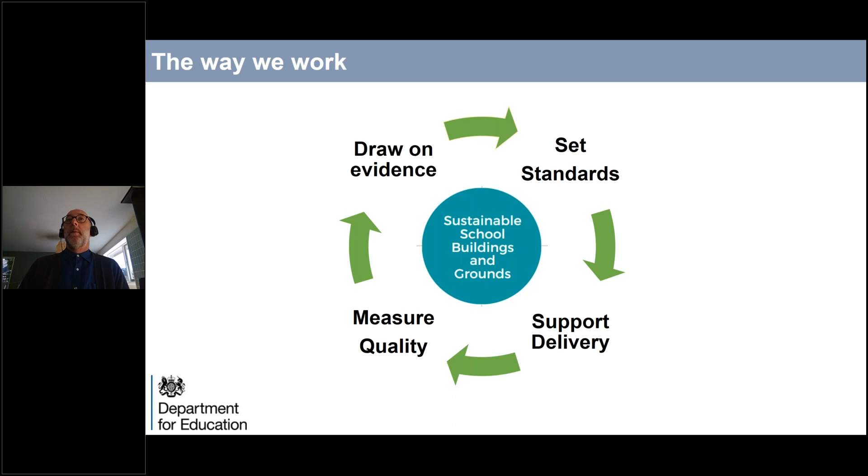We've set a 10-point climate change model to drive forward the agenda at school. That's all about efficient use of space, reducing energy demand, then optimizing energy efficiency. I'm not going to run through all of the key aspects of it.

We follow the fairly traditional green model of be lean first, and then be green following after that. That's really important to us, that we get fabric first approaches to our buildings rather than focusing on technology. Behaviour is really important to us as well, so it's all about operation at this point, and it's clear that we've got a plan to get to fully zero carbon buildings by 2025. I'll pick that up in a second.

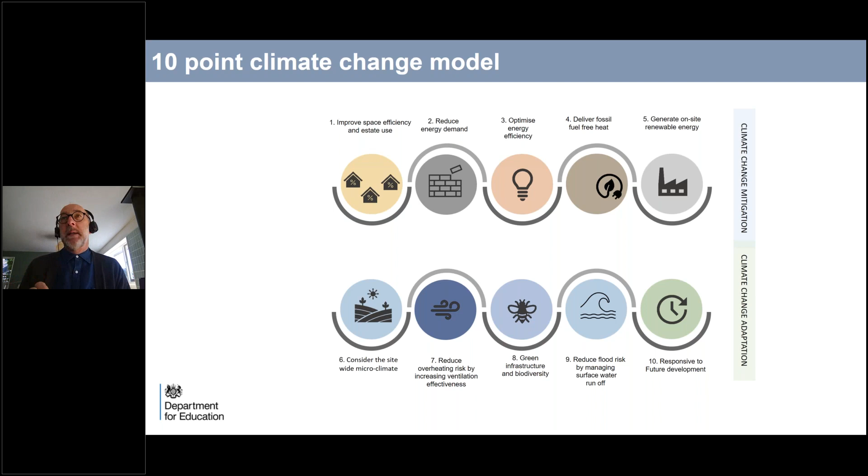Another key aspect in terms of site is the use of green infrastructure. We now understand that green infrastructure has got multiple benefits in terms of bang for your buck in relation to building construction. Maximising green infrastructure is a key aspect for us. It will play into a lot of government strategies in terms of the environment, increasing biodiversity, but it has super effects on the building in terms of cooling, and brilliant effects in terms of health and well-being for the occupants. We think that's a key area we should be looking at across the industry.

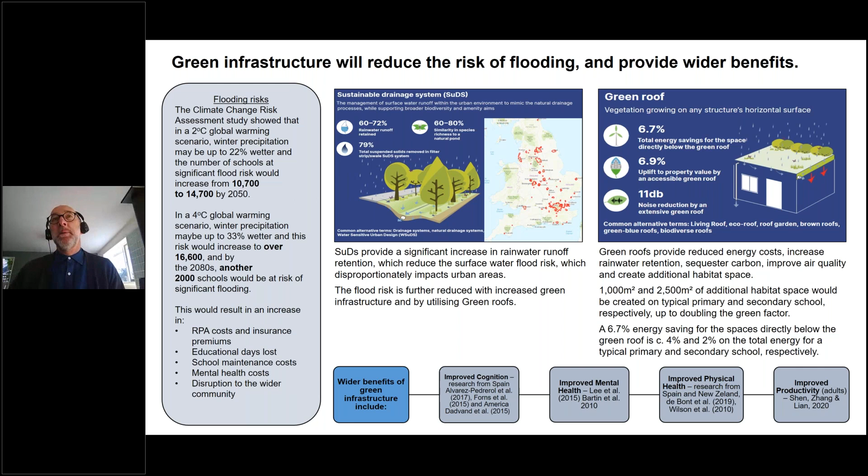As I say, we collect evidence and we measure quality and we collect evidence. So we've done a lot of R&D projects recently, and Thomas mentioned the Gen Zero project, which is funded by the Construction Innovation Hub and Innovate UK. It's a really unusual project for us because we don't often get the chance or the money to do pure research, and this has been a great opportunity to really expand the envelope in thinking about what a school building of the future could be.

So we developed two prototypes, one urban and one suburban, that are both zero carbon in operation, net zero construction carbon, really driving standardization and systems thinking. It's designed for manufacture and assembly, provides that unified site and building approach that I mentioned, that's user-centered, flexible and resilient. As I mentioned, it's got an urban and a suburban solution.

So we've come up with a new system for building schools based on a rigorous grid of mass timber solution. Studies we've shown, as many others have shown, that really timber is the only way to drive carbon out of construction. We're going to be building a prototype section of that at the Manufacturing Technology Centre in Coventry. We'd like to build a full-size classroom for COP26, but that's yet to be confirmed, waiting on future funding.

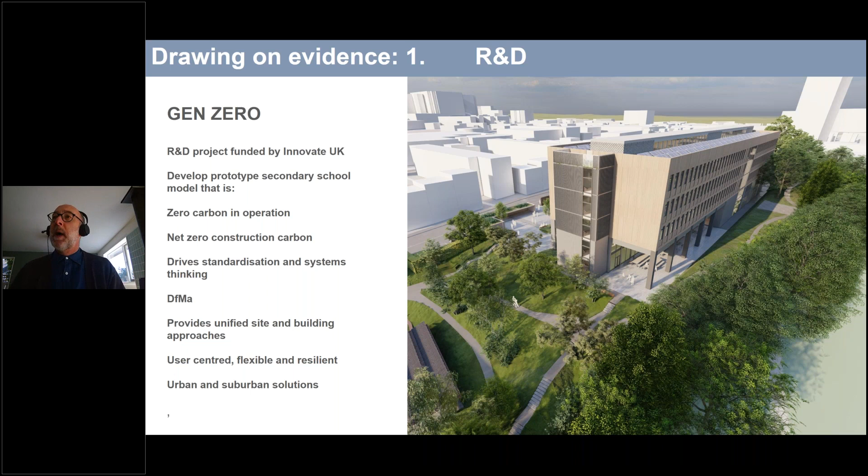Second bit of evidence: we've done a lot of pilot projects because we're a capital delivery unit, building lots of schools, so we can use those schools as test beds. We've got a Pathfinder project, the first one we have on site, a small primary school in Cornwall which is net zero carbon in operation. We take a fabric first approach and used existing MMC contractors. This is all about tweaking existing ways of working and improving them - can we, through normal means of production, deliver much better schools? Again, we've emphasized the use of outdoor planting and green infrastructure.

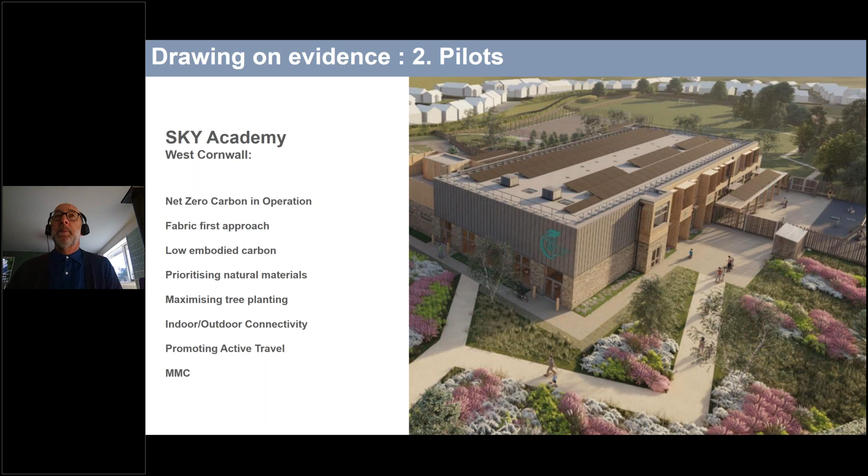The third project is St Mary's Biophilic School, which will be England's first biophilic school. St Mary's in Derby unfortunately burnt down last year, and we've taken the opportunity to do a development project led by the design team that's going to drive forward the use of green infrastructure for environmental, educational and health and well-being benefits. But again, using principles of standardization, following through our Gen Zero model, off-site construction - a really fantastic opportunity. That should be on site within about 8 to 12 months.

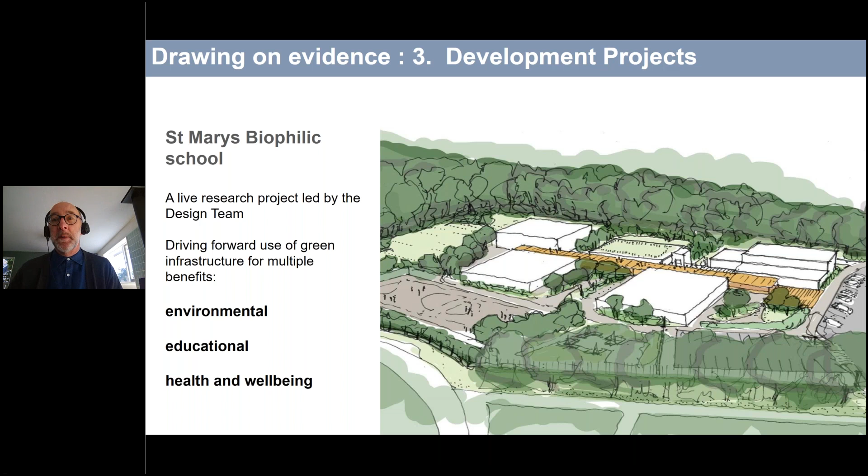We have got a new specification for schools. So all of our schools are built to a very standard specification that's based on all that evidence work that I mentioned at the beginning. But we're about to launch a new version of that, which is net zero carbon in operation. That'll be ready from November 2021.

That's going to put the long-term needs of the school users at the centre of all our decisions, future-proofed against climate change, create a healthy and productive school setting, and prioritise the application of low energy, fossil-free buildings. So we're looking at mitigation and adaptation - we're particularly concerned about how schools cope with climate change, overheating and flooding, but also about improving biodiversity.

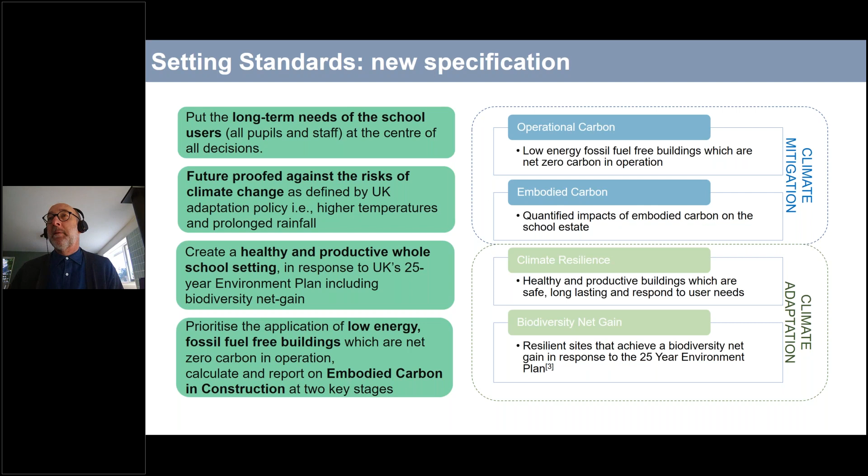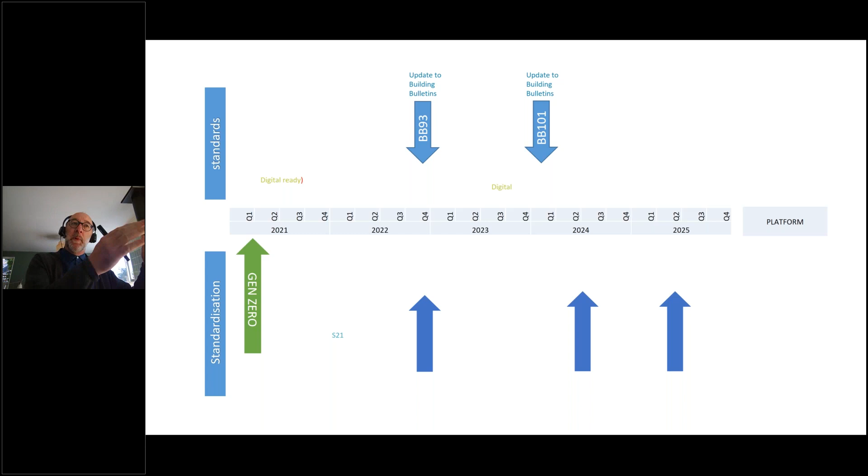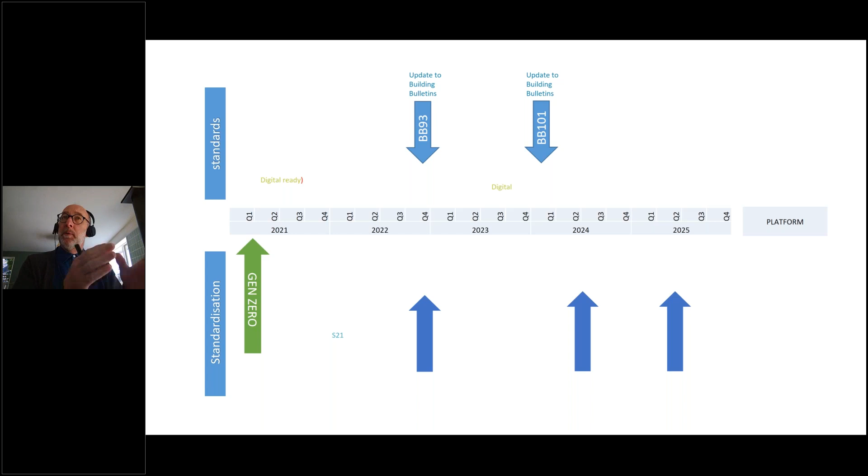I want to take you through the journey we're on in terms of meeting net zero carbon. We're splitting this into two aspects: standards and standardization. Standards is all about what we can do and when we can achieve it by, and standardization is the best way of achieving that on a large scale program.

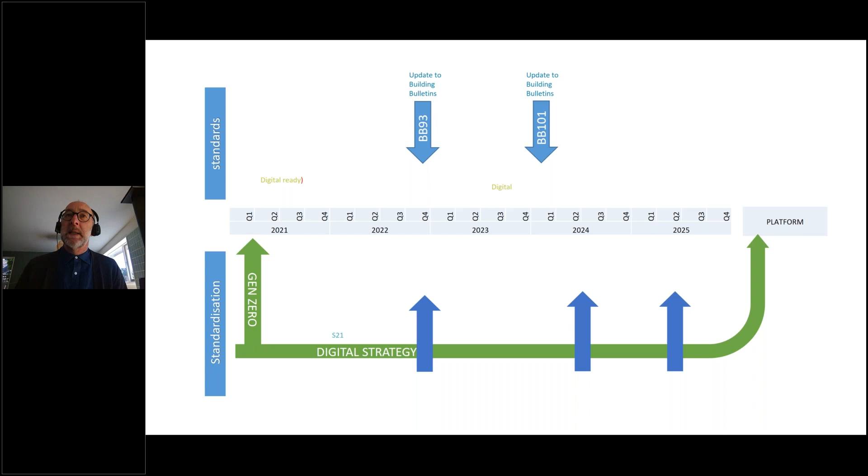We have our Gen Zero learning up front, which we'll combine with a digital strategy, using the best of information technology to drive delivery of new buildings, management of existing buildings, a sustainable school strategy covering 22,000 existing schools as well as new buildings, and a commercial strategy — a different way of building, procuring and financing buildings.

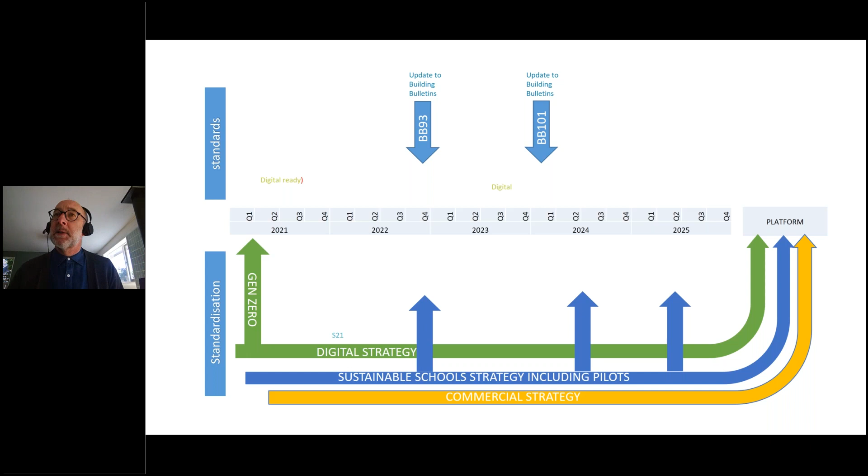We don't think business as usual will deliver the right outcomes. So we've got our new output specification ready this year. We're going to develop new standard designs based on our Gen Zero model, asking contractors to follow those from 2022 onwards, and we're adopting quality management systems internally.

We'll have a further version of our output specification setting construction carbon targets in 2023, followed by a digital version of our standard designs with parent and child BIM object models. We'll work out the best way of delivering something and allow contractors to drop down those models, with further development of quality management systems.

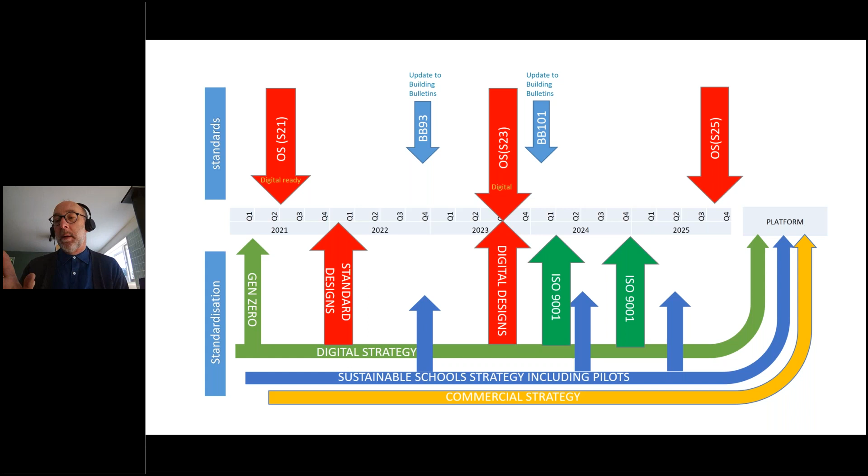Finally, in 2025, a complete output specification addressing construction carbon as well as operational carbon, realizing a platform system approach to delivering complete new schools — good quality buildings, net zero carbon, health and well-being, and a great quality environment and habitat. That's the end of my presentation.

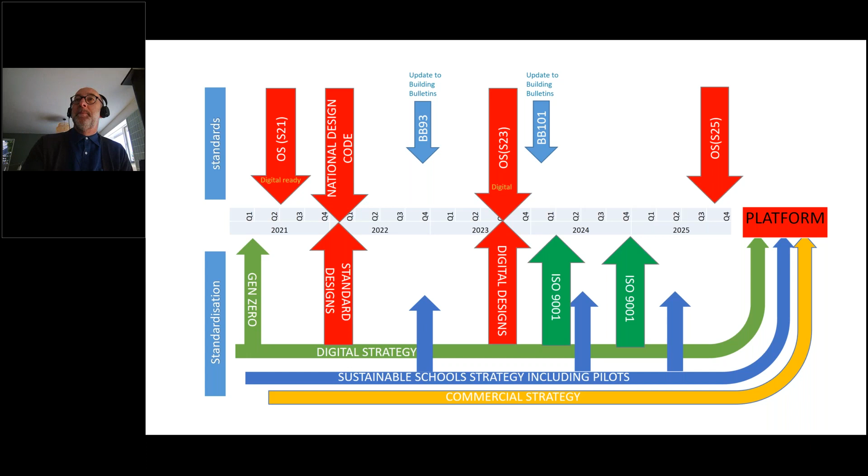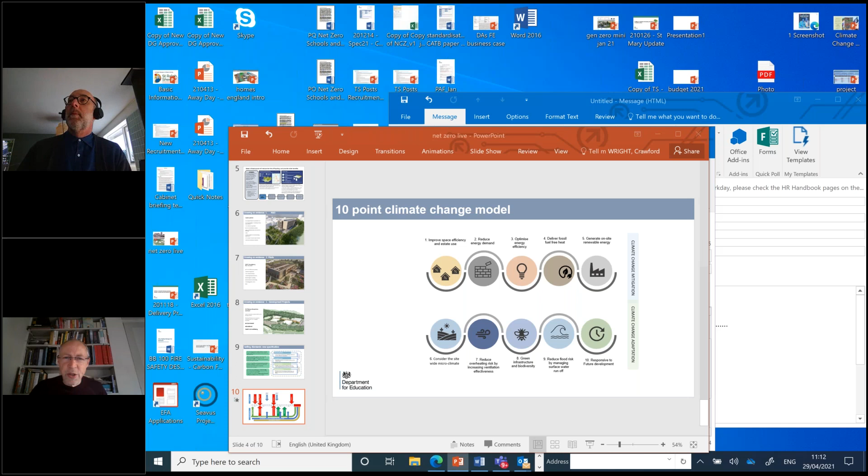Great, thanks very much, Crawford. It's really interesting to hear about the work you're doing. With Gen Zero, it's obviously a huge undertaking — is there anything that represents a particularly difficult challenge, given you have to consider so many things with a net zero school?

Well, I think the same challenges we're all facing across construction: can the construction sector deliver net zero carbon buildings? That's the key aspect of our Gen Zero project — how do you unpick a traditional sector and rebuild it, thinking about carbon and rethinking our use of materials, within the current regulatory framework, which may in some circumstances work against us. Take timber, for example, and reducing the amount of concrete and materials — we've got our own standards working against this, things like acoustics and lighting. Is it time to rethink all our standards and measures to deliver these outcomes?

And I come back to our understanding of buildings in use — I think this is a big gap for the sector. We don't really know how buildings are used. We design them and then walk away, without really understanding how they operate over their lifetime. That's the missing piece for me — what do we really know about buildings in a much more holistic way?

Great, well, thanks very much. Maybe some of the issues you've raised will be covered by our speakers. Our next speaker is Simon Nicholas, the UK Managing Director of the Robert Bird Group. If I can hand over to you, Simon.

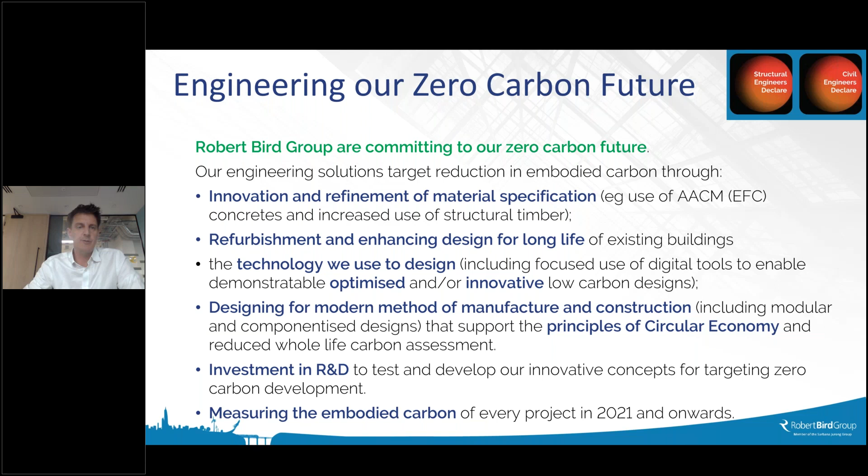But we're in a transition as an industry, and I think it's appropriate that we recognise the transition, but don't let that be an obstacle or an excuse. We need to find innovation. We need to find alternatives.

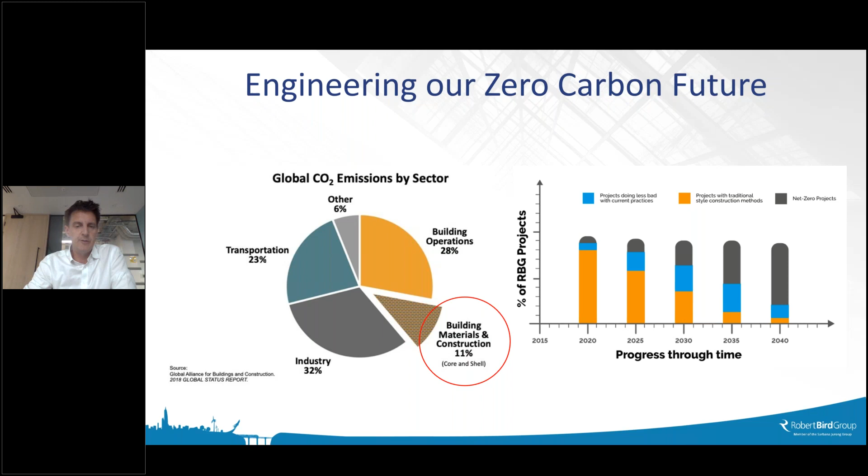Mass timber is one of those alternatives. Timber's been a structural material for millennia. It's a great structural material. It has challenges around fire performance and acoustics, and I think there'll be issues of supply as timber's used more and more as well. But we've done several projects in mass timber and continue to see this as a really important material for us to design and specify as structural engineers, particularly on low and medium rise buildings where the challenges can be better mitigated.

It's important that we think through as a multidisciplinary team how to resolve those issues which go beyond just pure structural performance.

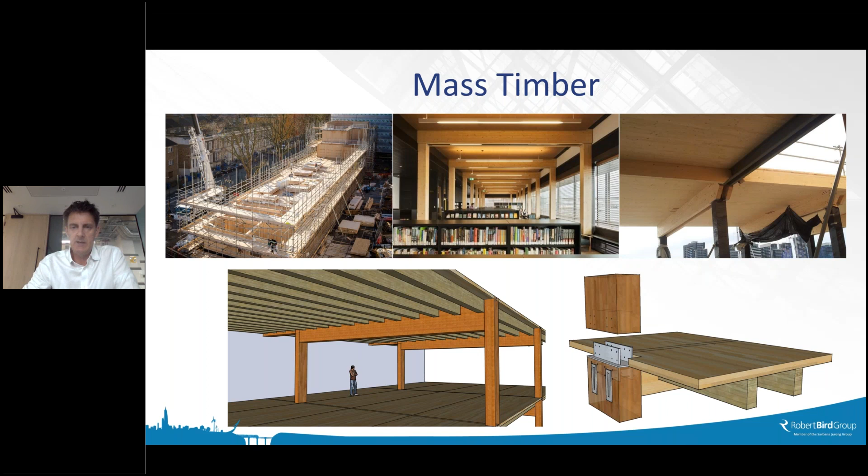Circular economy and designing for reuse, I think, is a really important part of a structural engineer's approach to carbon. How do we use and invest the carbon intensive materials which are the normal, but in a way where they're able to be reused at the end of the building's life, not demolished and going to waste, as so many of our buildings currently are.

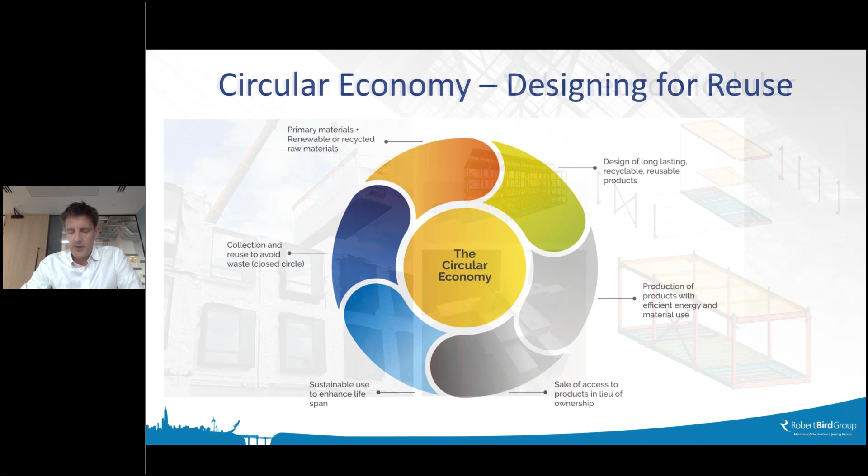Modern methods of construction provide an ability to do that, or an overarching name, if you like. There's no one way which I'm here to sell. I think different projects have different forms of modern methods of construction.

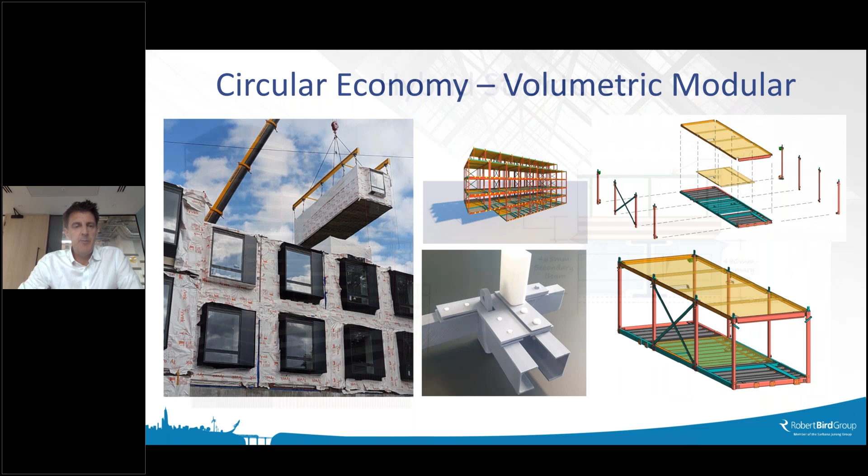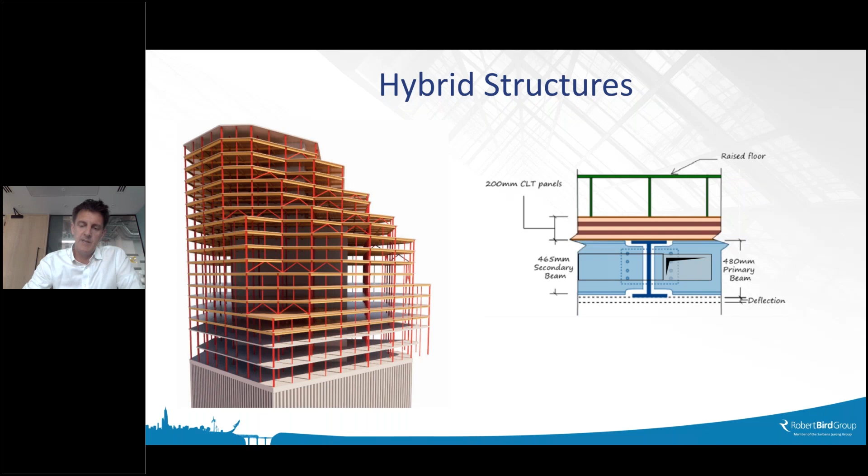So the steel is able to be specified in a way which embraces the circular economy and able to be disassembled at the end, but we're still able to use CLT floor panels instead of concrete, giving a great product in terms of visible timber, but also using timber as a low carbon material. Hybrid structures, I think, open all sorts of opportunities to use the right material for the right job, enabling more zero carbon or low carbon materials to be used than seeking to use all of one material or another. This is another example.

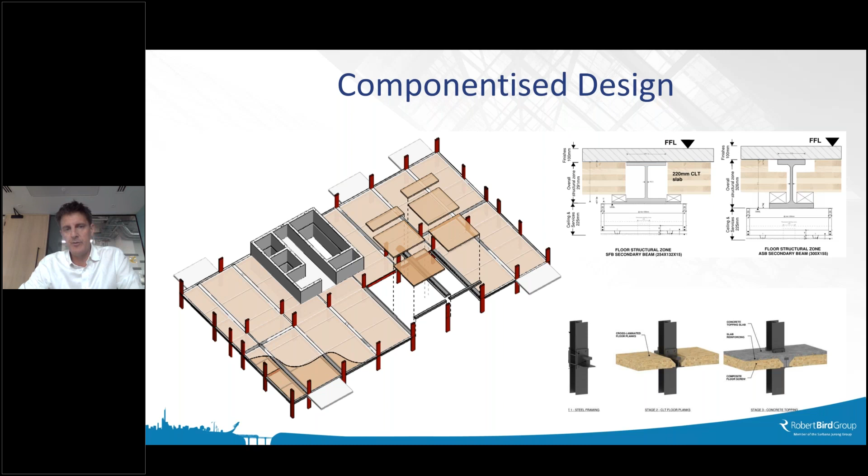Interestingly, one of the challenges here is we were led down a path initially to use delta beam type designs, which are great and enable a flat soffit and various other benefits. But because you fill them with concrete as part of their performance and fire protection mechanism, you undermine the circular economy design principles because you can't then remove that grouting at the end of life to reuse the product. So we're now moving away from that and looking at how to use more conventional sections which are able to be reused at the end of the building's life and upcycled.

We're able to demonstrate that many of these solutions do not come with a cost or program impact, but actually come with real cost and program benefits. But we need to be able to communicate that so the right decisions can be taken.

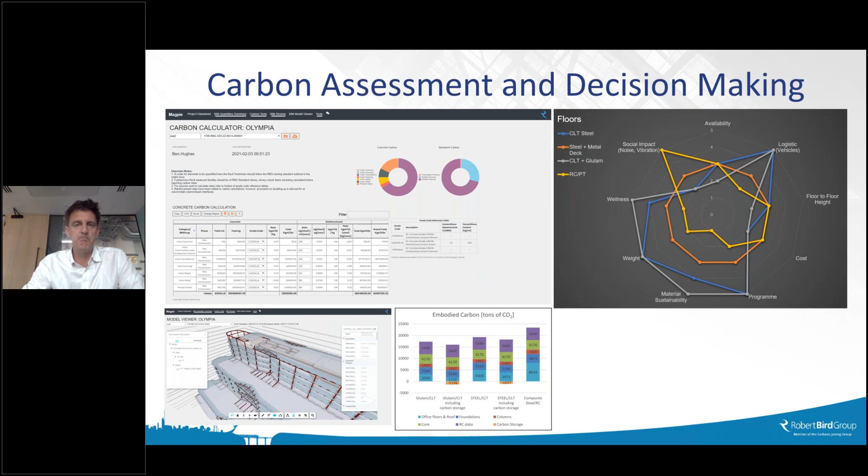So just a final comment: the future is today. We must change how we design and embrace innovation if we are to achieve zero carbon developments. Designing just to be less bad is not good enough. Thank you.

Thank you. Can you see my screen? Yes, that's fine. The slide, that's perfect. Thanks very much.

Thanks for the first two presentations, those were really interesting for me to listen to. So yeah, I'm Jesse Putzel, head of sustainability at BAM Construct. We're BAM's building arm in the UK, and we work on all sorts of types of projects. We do a lot of schools and education, health, and commercial, as well as specialist buildings.

I'm going to use a couple of examples to talk about some of our experience and some of the challenges. I just wanted to start off - as a construction business, we're actually a small property developer. We're a designer, a facilities manager as well, but the main part of the business is being a main contractor.

But we've had a long-standing commitment to reducing our impacts. So the focus has been on being more efficient, using low carbon sources of energy, and really driving carbon out of the business - not just by shrinking as a business, but by actually staying pretty steady and reducing our emissions intensity over time.

And we've got a range of leading commitments. We're one of the first contractors to have an approved science-based target. We're on the CDP A list, just about to get a platinum award through CEMARS for over 10 years of continual reductions in our emissions. And we're working on some new commitments which will be announced, to accelerate our move to net zero well ahead of 2030.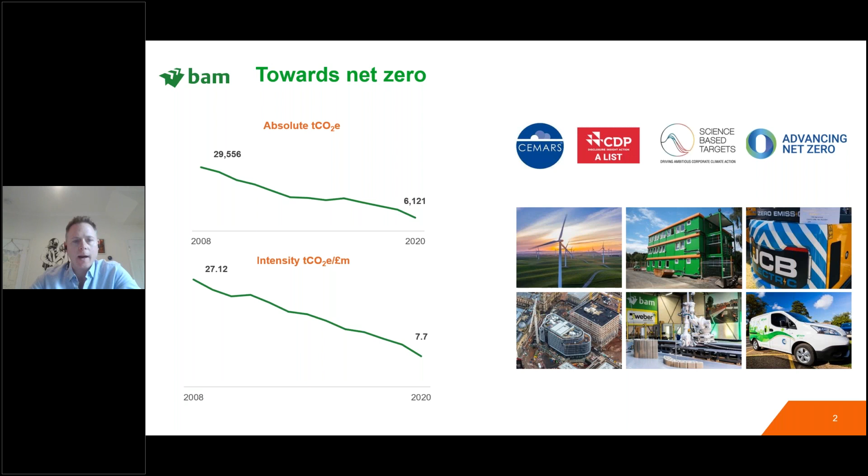I mean, that's all well and good - we want to reduce our impacts, and we're definitely on track. But of course, it's kind of a matter of scale, and this is a different way of looking at some of the things you've already seen. As we transition to that net zero point, which we will get to, we're a very small part of the overall picture.

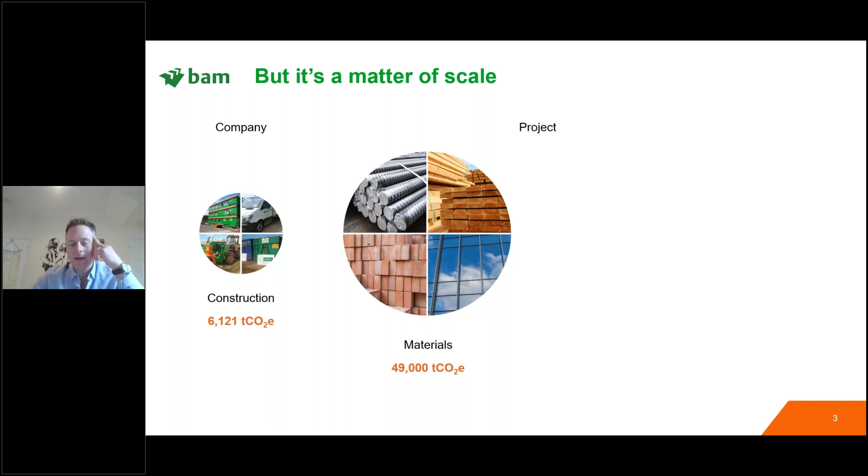When you look at one large project - it's actually a project I'm going to touch on later - before any kind of optimization for reducing its carbon impact, you can see the change in significance of impact just from the materials of that project. And then of course, if you add in the whole life of that building, it's dwarfing our impact as an organization.

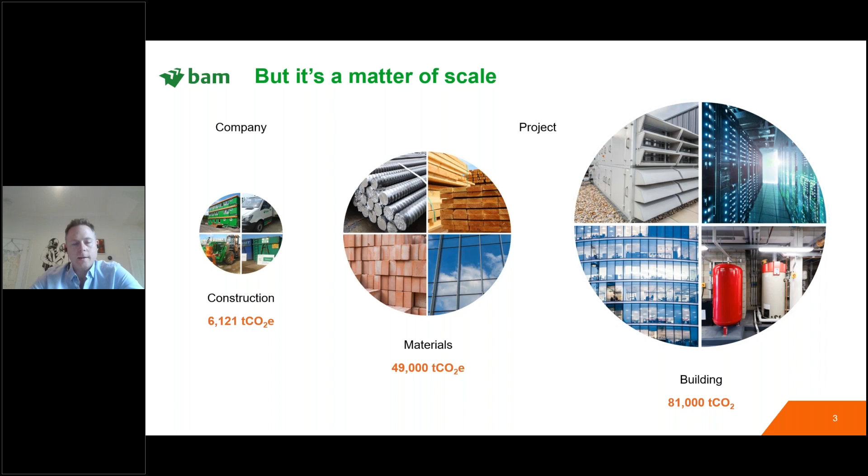So not surprisingly, increasingly - and part of the reason we've made various commitments - is we know, with clients and design teams, we need to focus on reducing these two areas on the right. So we're talking about net zero carbon buildings. I suppose as a contractor, we're kind of at the end, receiving aspirations or targets or claims from clients, and being asked to respond to those.

And we've seen a massive upsurge in interest, not surprisingly, in the last 12 months, but there's still quite a variation in the aspirations being set, some of the definitions being used, and I think there's still opportunity to do better there. It's great to see the likes of DFE actually being very clear on what their aspirations are and setting some really robust targets, and we are seeing more of that.

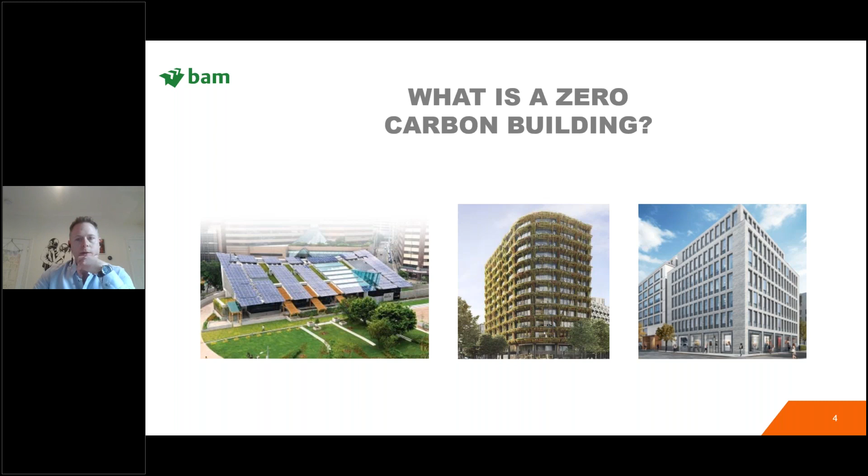But there's still room for improvement, and we're seeing some lost opportunities as well, where cost now is trumping potential cost savings and benefits later down the line. So I think because of that, before getting into a couple of examples, we need to be really clear on our aspirations right from the start, and all the work that's been done through the Advancing Net Zero programme with UK GBC is starting to gain traction with this.

We also need to be realistic - realistic in terms of what getting to net zero means and by when. Not all buildings or building types that are still needed within society can be self-sustaining, for instance in energy terms, through on-site generation.

We need to consider the buildings we build now in the context of a wider decarbonisation of our systems in the country. But of course, we also need to be challenging, and for us, challenging to push energy efficiency and energy demand down as far as possible is the #1 priority.

Challenging on views of costs. We've had very real examples where net zero opportunities, or future net zero enabled buildings, have been scaled back because of initial costs. And then maybe, controversially, even challenging whether we need a new building in the first instance.

And lastly, it's fairly obvious, everybody talks about collaboration, but it's really important from early stages, obviously for us as a contractor, and collaborating with the supply chain from early stages is key to achieving net zero. And also not having that collaboration stop when we finish a building, but carrying that through to the operation of the building.

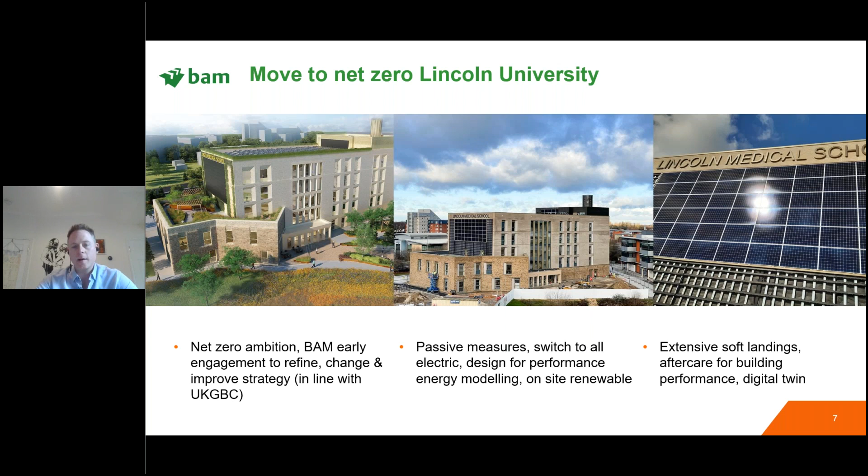So we look at this as a kind of net zero enabled building, and in terms of how it performs, there are no energy use intensity targets within net zero definitions for medical schools, but in terms of how it performs against commercial offices, it's pretty good, considering this is a much more energy hungry type of building.

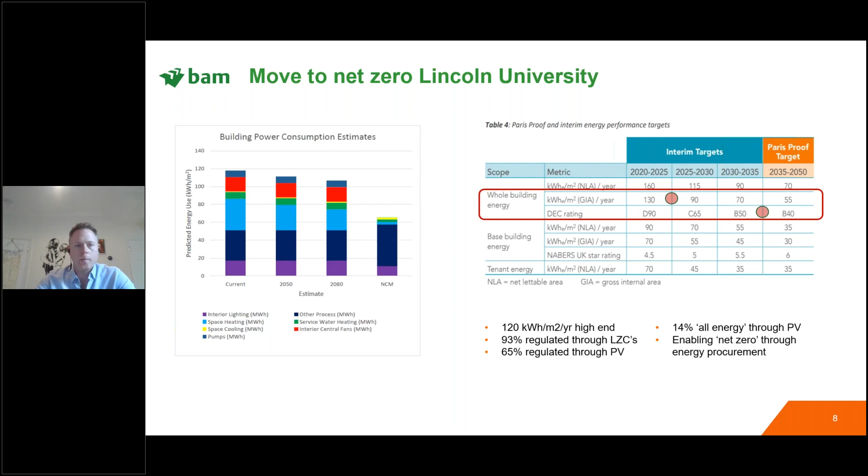But I think this speaks to that point about being realistic, because actually the university has achieved something great here, and they've got the ability to operate this as a net zero building in the future. And then another thing that was key for this is that collaboration and a focus on performance throughout.

So throughout the design and construction process, but then also, we're there for 2 years working hand in hand with the university, remotely monitoring and measuring the building through a digital twin, and working with them to optimize performance.

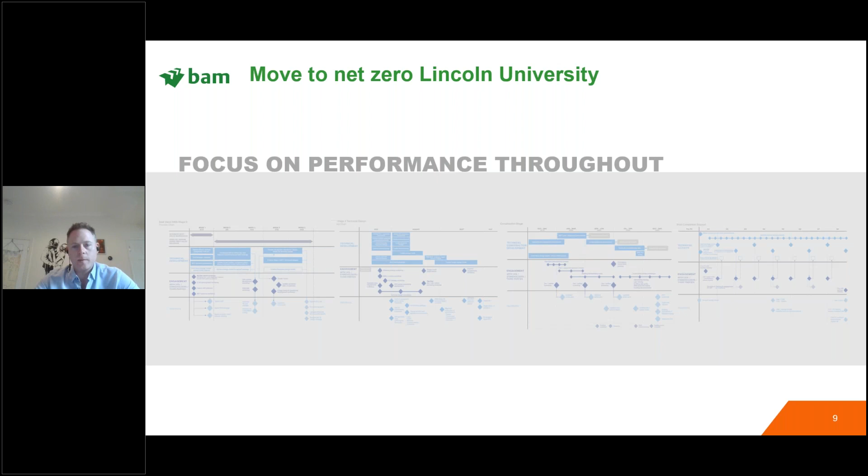So then a big issue and increasingly important for us is embodied carbon, not least because when we talk about operational carbon, these are impacts that are happening in the future at some point. Embodied carbon is impact that's happening today. When you look at our business, in a given year, the kind of collated carbon impact of materials

that go into projects we're delivering could be as high as 600,000 tons of CO2. So it's a big chunk to be going at. But there hasn't been enough focus on this historically, and it really needs to be addressed early on.

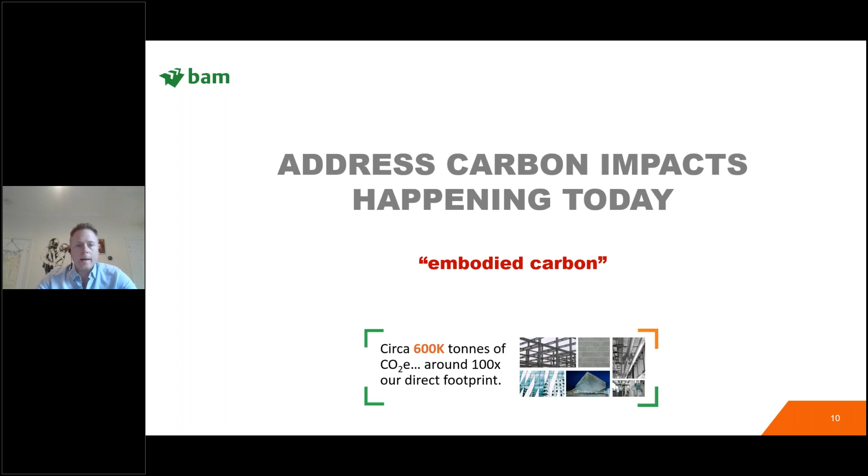And I've just got a couple of examples. So again, this year we finished, it's actually our largest project to date for Argent in King's Cross at T-Zone. And this had a focus on driving down embodied carbon right from the start. It is a very large building and it's still built out of concrete, but it really was the first time we'd been involved in a project with this kind of focus and collaboration.

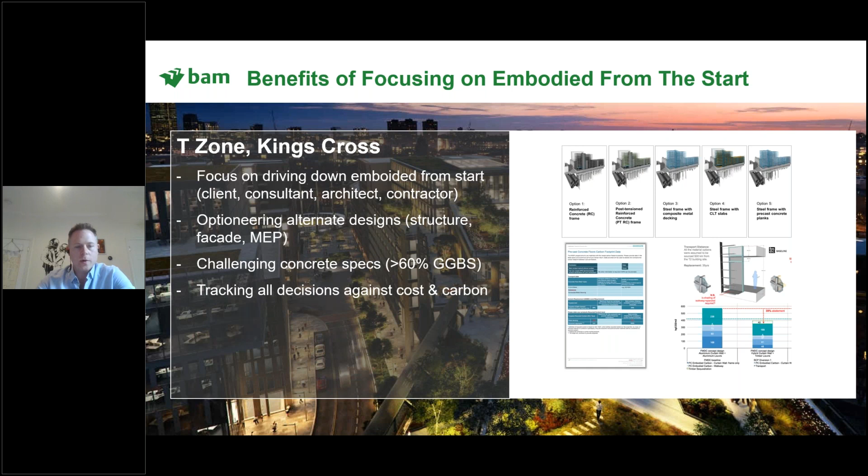And as you can expect, there was a lot of work done to optimize the design, to look at different options, and actually cost and carbon were looked at alongside each other. And there was a lot of engagement with the supply chain from a kind of getting data early point of view, but also in challenging specifications.

And in the end, we've collectively managed to take out 10,000 tons of CO2, which for us, when we think about our organisation, is more than our annual operational carbon emissions now, that they've been driven down below that figure. So it's proved a real benchmark for us to work forward from.

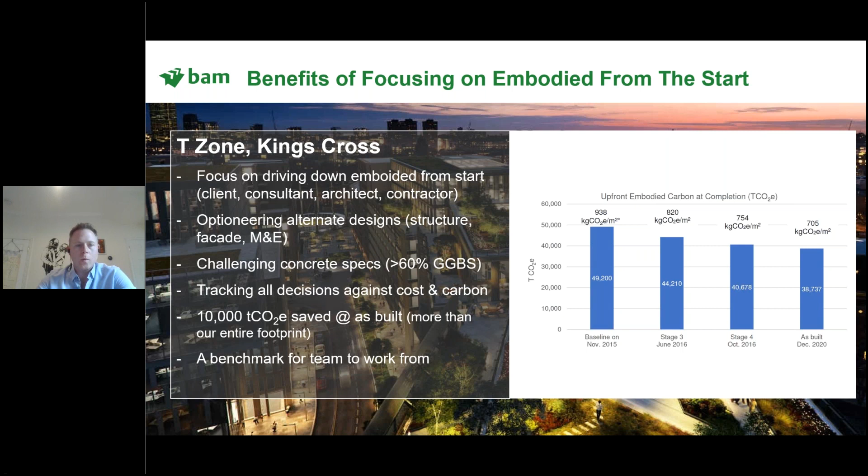And then at the other end of the scale, what does a net zero carbon in construction building look like? Just briefly, this is our first net zero carbon in construction project, at King's Cross.

A very different approach, very different type of building, but a real milestone for us and the development there. There was a total focus on low carbon, both operationally and embodied. It's an all timber structure, really lightweight substructure, use of low carbon materials outside of the timber as well, like low carbon zinc facade cladding.

And actually, this got so low that we decided to take it that step further, and the UK GBC guidance had just been released earlier this year. So we've offset a very small amount of residual emissions from the project.

It is obviously completely different scale, but I think this is a huge challenge. Not every building—we just talked about the difficulties with timber, or perception of difficulties—can take this same kind of approach. It's not transferable. So there's a huge challenge to tackle here.

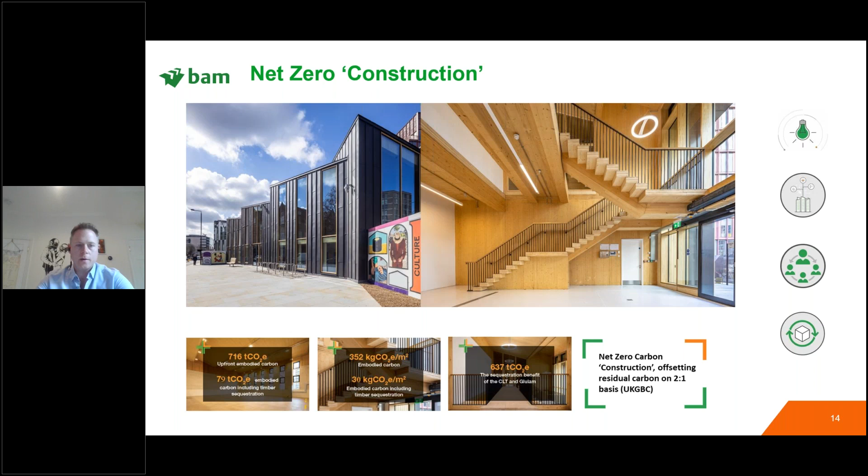And just the last point I wanted to make was around the points on circular economy. We really need to be using less, and there's a lot of existing buildings or existing materials that could be used. I won't go through these in detail, but when we think about getting to the challenging targets we have to meet, we've got to consider building and material reuse now, but also for the future. Thank you.

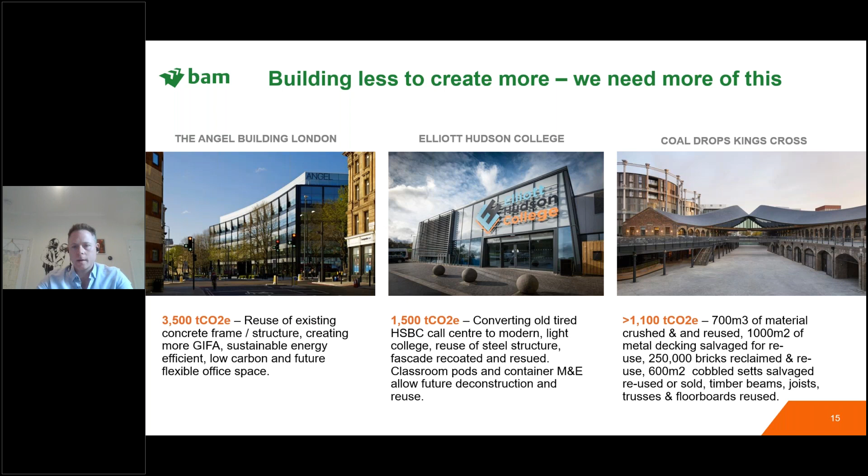Great, thanks very much, Jesse. It's really interesting. One question before we move on. You've got to marshal a pretty long and diverse supply chain on projects, and presumably at the end of that there are SMEs who are quite far removed from you. How do you, when doing a net zero project, get the message out there and ensure that all aspects of that long supply chain embrace the net zero carbon agenda? And are there any forms of contract or other mechanisms that would make it easier?

That's a great question. I wouldn't say we've gotten right to the end of that supply chain with the net zero message yet—it is a big challenge. What we have done, where this has been a focus, and it's still not every project although hopefully it will be going forward, is carbon and those related aspirations form part of the discussion from the first stage of communication with our supply chain. Now, whether it then cascades down to the sub-tiers is probably where the bigger challenge is.

But we make it part of our procurement process, part of our contract requirements, not just up front but in terms of data that gets provided later on. There's a huge education piece to do. We're working increasingly with a growing number of material suppliers to talk about carbon—less with subcontractors—so that we can have that direct link with them, and in some cases upskilling them where they don't actually have a view on the carbon impact of their products, helping them make that transparent through producing EPDs, for instance. So there's a lot more work and education to do.

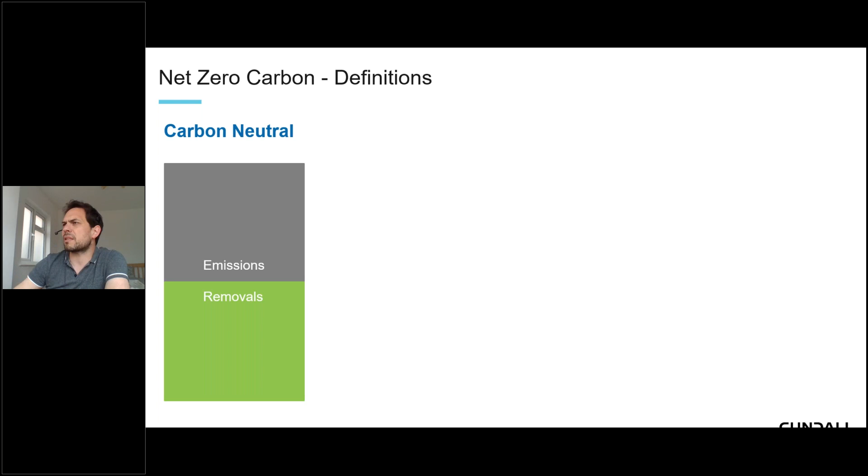So just going back to those definitions we were talking about earlier. Over the last year and a half, we've really come to understand the difference between carbon neutral and net zero carbon. Carbon neutral, which was bandied around for probably the last 4 or 5 years, is just basically removing as much carbon as we put into the atmosphere, which is good. A number of businesses are now carbon neutral certified.

But the next step forward, and where we really need to get to, is net zero carbon, which is basically reducing our emissions in the first place down to a point which aligns to the Paris Agreement 1.5 degree scenario, and then removing any residual emissions associated with that. So it really is focusing on reduction strategies first, significant reduction strategies in alignment with the Paris Agreement.

The absolute end game, and what I'm working with a couple of developers on, is their absolute zero carbon strategy, which is basically to get down to zero emissions, which is going to be extremely challenging. And as the last presenter indicated, this is really where we need to start working with the supply chains.

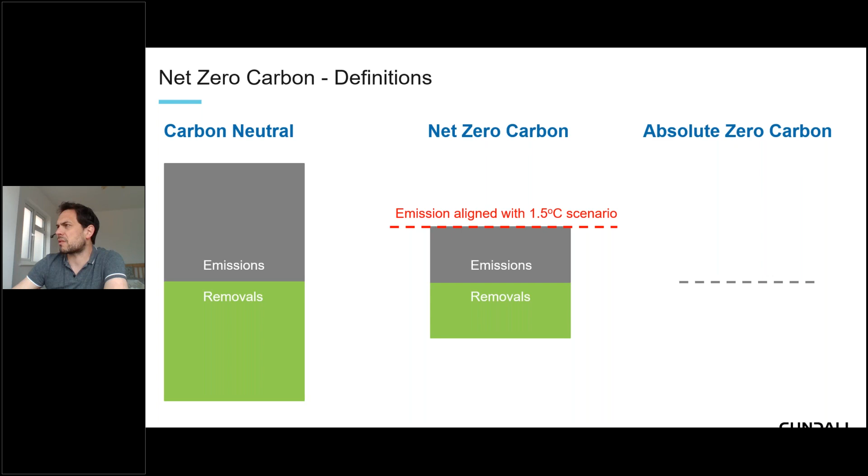Because we can see that net zero carbon buildings are just about possible now. It's extremely challenging. Absolute zero carbon is a long way off, and the only way to really get there is with the full supply chains looking at their carbon emissions and how they reduce those down. A number of the most forward-thinking developers are starting to look at this and set themselves targets around that absolute zero carbon.

The main framework which most people refer to is still the UK GBC, and it's really clear and concise: reduce construction impacts and have those clearly aligned science-based targets on the construction side, reduce operational energy in line with the Paris Agreement, and then provide that energy in accordance on-site from renewable sources, and when not possible, off-site, and then offset any residual emissions.

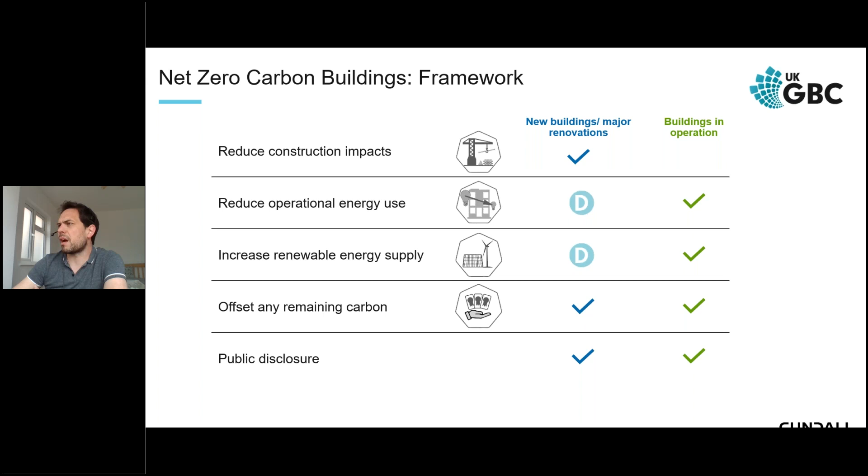I'll focus now on the operational energy and the intensity targets. We need to align with the Paris Agreement targets and move towards a net zero carbon economy as a whole. The way we do this is to phase out fossil fuel use and move to an all renewable grid. The only way we can do that is by increasing the amount of renewables we actually produce in the UK, but also reducing demand.

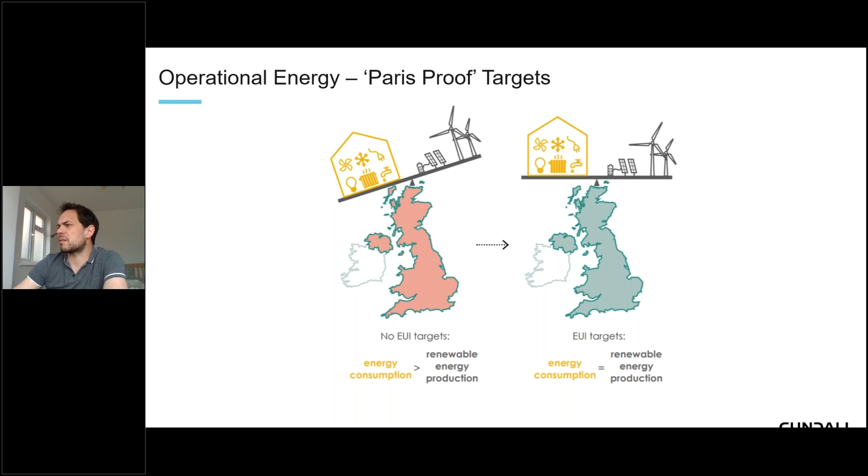In order to meet the net zero carbon requirements, we're going to need to double or potentially even triple the renewables supply we get, but that will only supply so much. In order to have an equitable, fair share across all industries, we're going to need to see significant reductions. For buildings, that roughly equates to about a 60% reduction, both for the operational energy and the embodied carbon. So we need to be 60% better than best practice at the moment in order to align with the Paris Agreement and that science-based target trajectory.

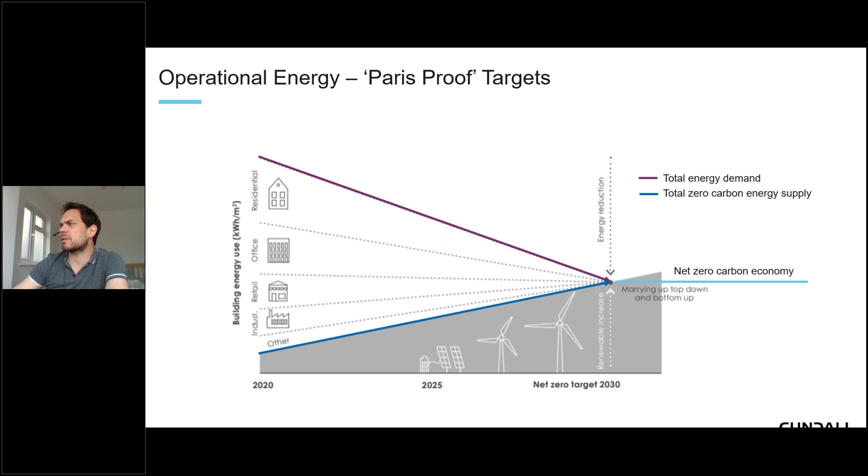There are a number of investment funds and hedge funds which are starting to look at their existing portfolio and how they can actually start making these reductions to align their buildings and assets in accordance with the Paris Agreement. One of the main mechanisms for doing so is a system called CRREM, which is basically using science-based targets to set trajectories for different types of buildings. You can look at individual buildings, or you can look at a portfolio of buildings, which has a rolling target reduction year-on-year to 2050, which basically aligns you to the Paris Agreement.

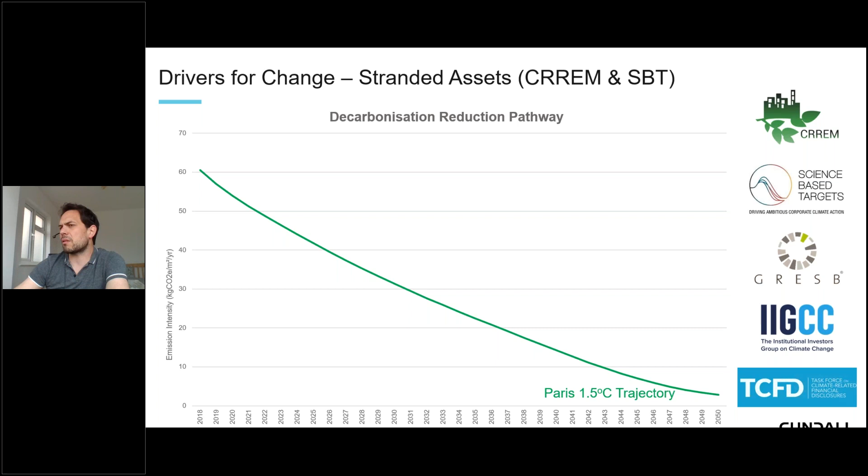The idea is that you get to the end target. For an existing building, what you do is look at your current emissions, which probably will be, if it's a good building, a best practice building, below that trajectory now. But if you don't do anything to that building over time, as the trajectory reduces, it will come a point where you actually exceed that emissions trajectory.

This is known as a stranding point, where basically you're no longer in alignment with the Paris Agreement, and that asset will potentially start getting a brown discount and less investment. With the government's net zero carbon targets, which are legally binding, they're also likely to start penalising buildings which do not align to the Paris Agreement, so there could be taxes or fines associated with not achieving compliance with the Paris Agreement trajectories.

The government at the moment are talking about introducing mandatory energy performance ratings for existing buildings, which would start this process. So I'm working with a number of large portfolio owners and landlords, and what they're looking to do is map all of their assets and understand how they're operating in use, and then set pathways for those individual buildings so they don't hit that stranding point.

So the only way to do that generally is to retrofit those buildings, make them more energy efficient, take interventions to move those down, and that basically pushes the stranding point further, where you might need to do a second or third retrofit.

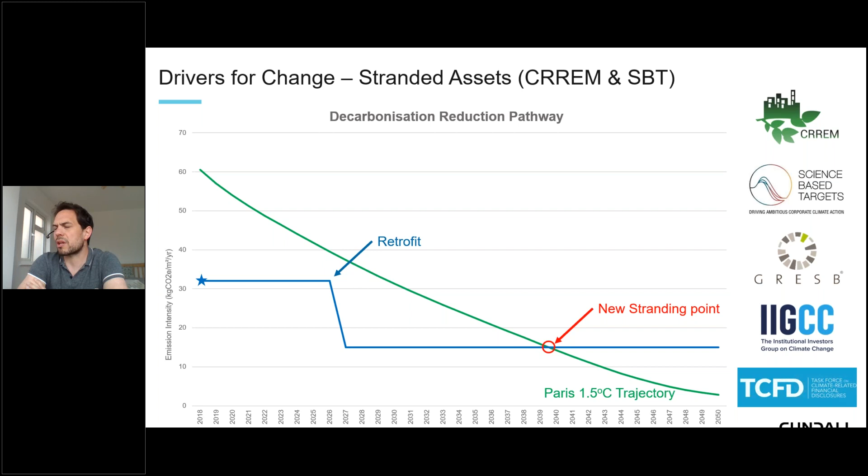The way that's done is looking at individual assets, understanding their energy intensity as it is at the moment, setting a target in alignment with the climate science, and the date for that could be 2030, 2050, depending on the client, or as fast as possible for that individual asset.

Once that's understood, you can start modeling and building digital twins to look at potential interventions, things like moving to all electric, installing heat pumps, a real focus on fabric first to reduce the energy performance, and introducing things like mixed mode and natural ventilation. And obviously behavior change is important.

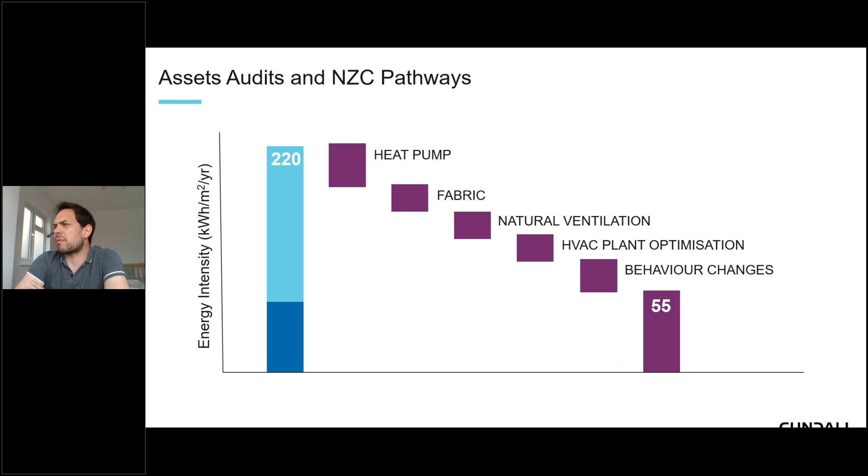For existing buildings, it's not as simple as just carrying out those works. Obviously, with sitting tenants, plant and repair schedules, you need to factor those in and schedule them out. And that could be over a 10, 20, or even 30-year period, depending on when lease breaks come.

This shows the importance that when you do get possession of floors and buildings, you really need to go in and take the interventions you can now, because if you miss the opportunity and then sign a new tenant up for another 10 or 20-year lease, it could be 10 or 20 years before you could actually achieve net zero carbon for that asset.

So it's a huge challenge. We've got 27 million private homes that need to be decarbonised, so a 60% reduction generally on most of those homes' energy efficiency. If you think about every school building, education building, office, hotel - every building you walk past needs basically to have a significant intervention in order to get down to an equitable fair share of energy use.

What is interesting though is for new buildings - and what we've seen over the last couple of years is a lot of people aiming for net zero carbon and trying to define that. The UK GBC and RIBA have set step trajectories in order to become net zero carbon. And this seems very logical, following a similar trajectory to the CRREM methodology.

So as we go forward, the energy intensity targets reduce from 170 to 110 to 55 from RIBA, and you can basically design a building to be net zero carbon. But the problem with this is it's a bit of a false economy, because if you build a building in the next 2 or 3 years which is net zero carbon to the 2025 standard, your building's only going to be net zero carbon for a short period, and then you're still going to have potential stranding events.

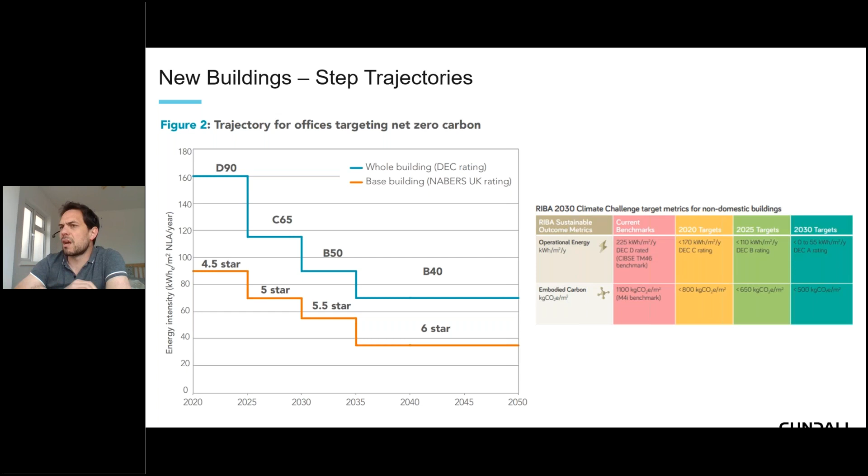You can move the step up to 2030 and move the stranding event to later. But basically, you're designing a building which will need to be retrofitted or refurbished in the first 10 to 20 years of its operations. And who wants to, and who can afford to, retrofit a new building?

So although design teams are pointing out - and there's been quite a few studies done now - indicating that at the moment the cost uplift to go to net zero carbon on day one is somewhere between 5 and 15%, you have to think about it over the life of the project, or even the first 20-30 years of its life.

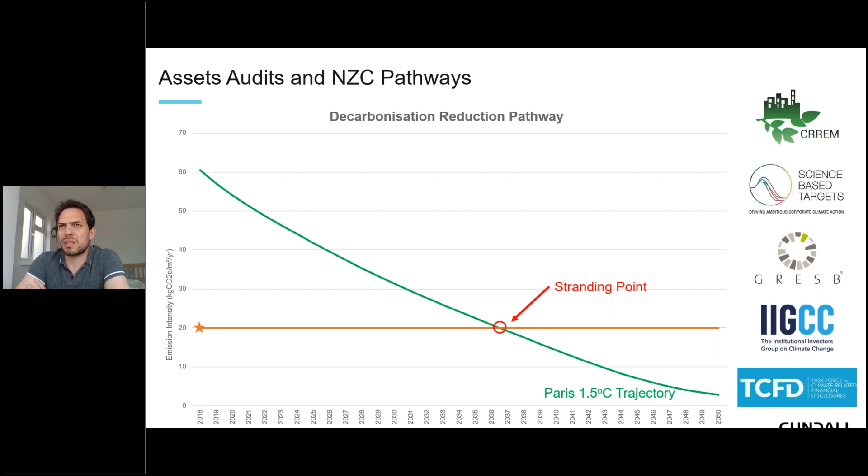If you look at a project with a cost uplift of 10 to 15%, yes, it's a significant cost uplift. But if you don't do that cost uplift now, you're going to have to potentially do significant works in the first 10 to 20 years of its life, and the cost of doing those works could be significantly more than 10 to 15%.

And it comes to one of my key points, which is basically you really need to get the fabric first. So maybe you might want to replace the services and reconfigure the HVAC systems after 20 years and move towards net zero carbon then. But what you don't want to be doing is rescaffolding and recladding a building, or doing significant works to the facade within the first 20 years. So it's really important that if you're building any new building in the next couple of years, you really focus on that fabric first approach.

Yes, there might be a small cost uplift associated with doing so, but the cost of doing those works in 20 years' time is going to be significantly more. And also think about the embodied carbon. If you're doing refurbishment, there's going to be more embodied carbon works required later on down the line. So it really pays, in financial terms and carbon terms, to carry out the works as soon as possible in order to drive those net zero carbon solutions as quickly as possible.

So that was kind of the end of my presentation, trying to re-emphasize the time to act is now, and we need to reduce the carbon emissions of all new buildings whilst also looking at pathways for existing buildings, which is the major challenge.

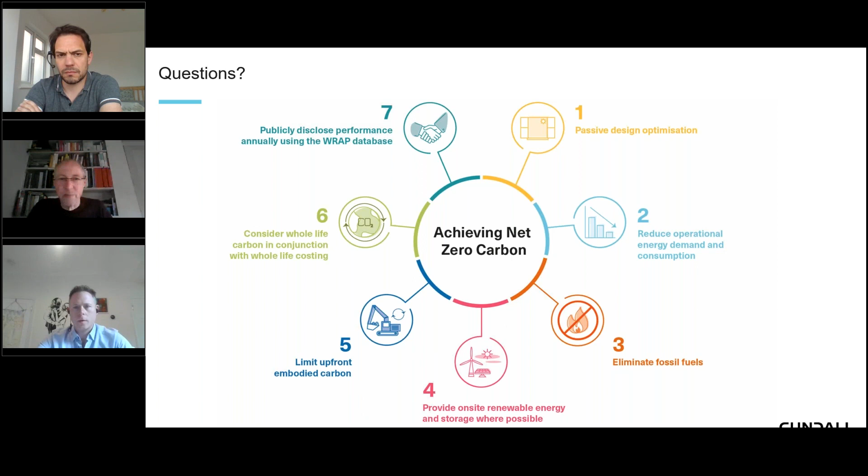Anyway, so following up to my question to Simon - we've got the future building standard and the future home standard making their way through the consultation process. Do you think we need more regulation? There's no regulation at all on embodied carbon other than the London Plan, who are now making it a requirement for developers to submit a calculation, but at the moment there's no target. Do you think we need a faster approach to really getting down now to embodied carbon and regulating on that?

I'll take that. Yes, absolutely. Embodied carbon needs to be regulated as soon as possible. It needs to go into the regulations. It's where building control could actually be effective, because we can report fairly accurately now the upfront embodied carbon on practical completion. There's no reason why you shouldn't regulate it. Building controls can sign it off.

What's interesting is building control at the moment have power on operational energy, but they have no influence on it because they sign the building off on practical completion before any energy is actually used. So what is really important, and what we're seeing from the government at the moment, is going to be the introduction of mandatory performance standards for all buildings. This will in effect be a league table of all buildings and their actual performance.

What will be interesting is that the penalties will be marginal, as we've seen from the government before, but it will be the reputation. If there's a big league table of all buildings online, no landlord or investor is going to want to be near the bottom of that pile. They're all going to be aiming to be at the top, and the universities are going to be competing to have the best performing buildings on there as well.